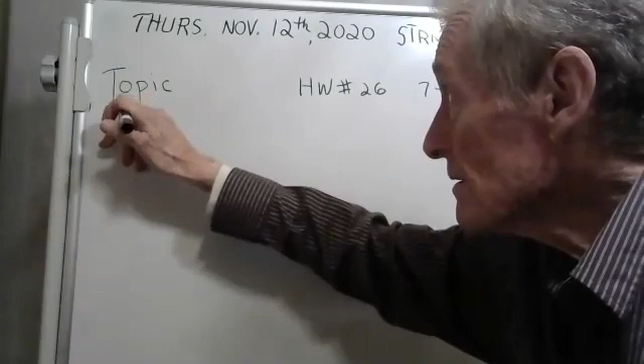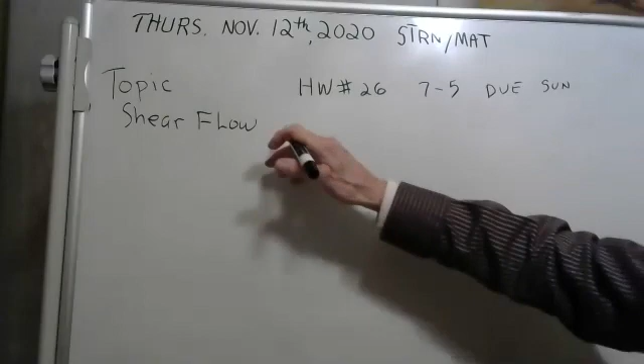No, I don't want to do your homework. Let me see what would be good to give you guys. Where is this stuff about shear flow? I think it's chapter 7. Let me snoop around here. Yeah, there it is. Shear flow. It's on page 386. Yeah, I want to talk about that. But let's see what would be a good problem to give you. Yeah, there's one there. That would be good.

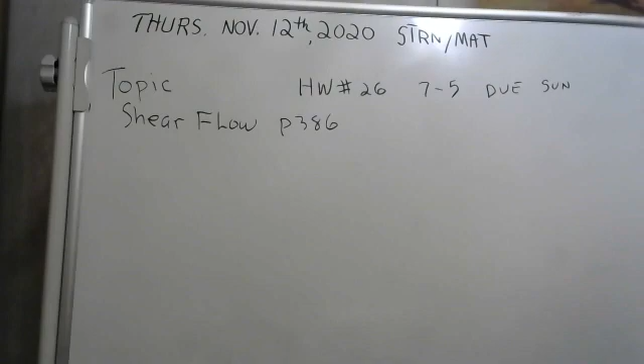All right. But before we launch into the exciting world of shear flow, do you have any questions for me?

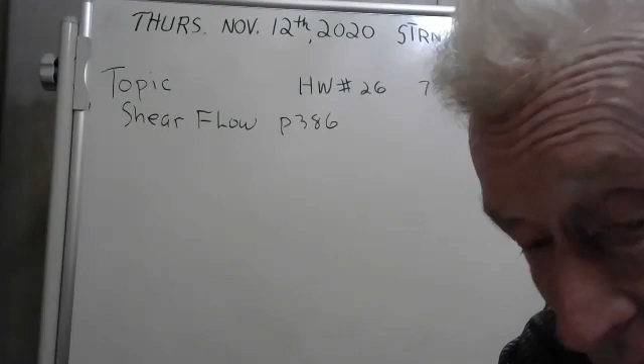Well, I wonder if I'm even connected. Let me go ahead, somebody. Hello, say hello. Hello. Yeah, hello. Yeah, we're connected.

Yeah, we're doing okay. Well, let's see if I can explain this shear flow stuff, and then we'll work a problem. Does that sound good? You're supposed to say, oh, yes, it does, Mr. Griffin. Okay, well, that sounds good. Yeah, it sounds good.

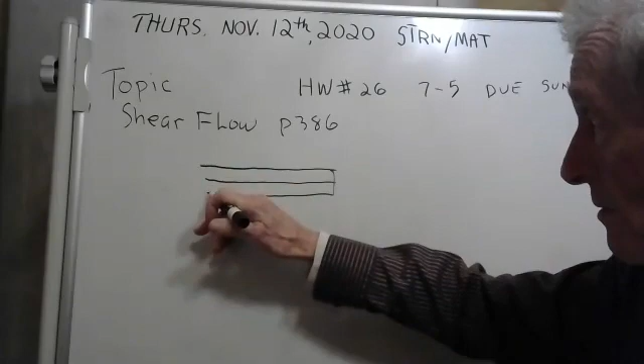All right. I've told you guys that if you have, they're talking about built-up members, and sometimes they'll put layers of maybe 2x6s together, and they can glue them even. You can glue a whole bunch of, well, maybe 4x6s, and you can make a beam out of that. See, if you glue them. But there's a weakness there where they're glued and they can slide if there's enough bending stress.

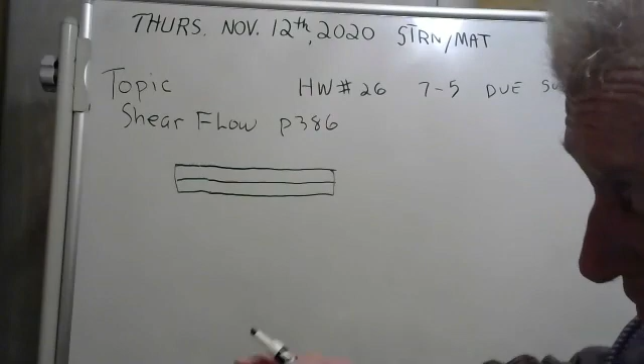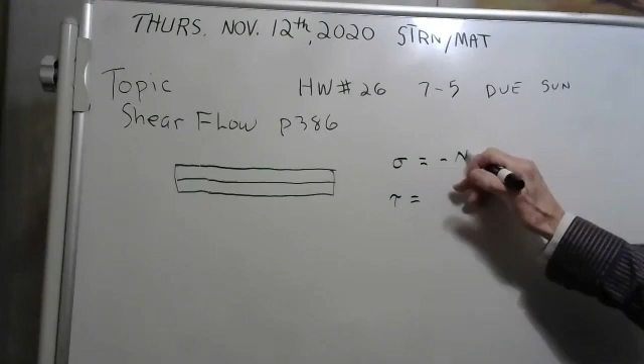You guys know that when you bend something, it creates not only normal stress but shear stress. See, the normal stress is given by this equation, and the shear stress - these are caused by bending. And see, if you bend this thing, usually the beams that we're talking about,

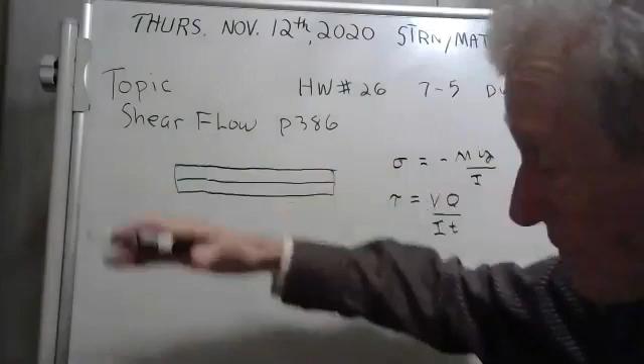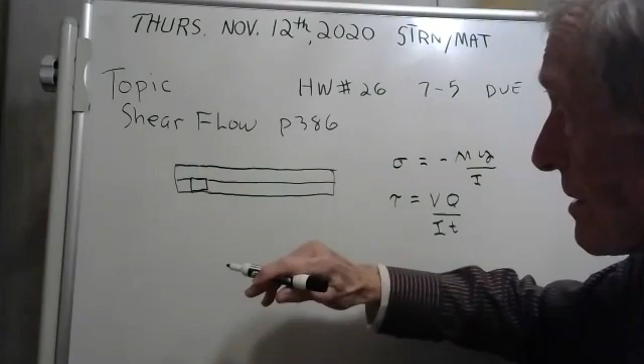they kind of sag in the middle. So there's a force from this top, whatever it is, of 2x6, on the bottom 2x6. There's a shear force going to the left. Here, I'll just draw us a little piece of that. Here we go. There's a shear force going to the left on that.

And that shear force comes from the top piece. That makes sense, because the top piece wants to slide if this thing is being bent. And that shear,

they have a thing called shear flow, and what it is, here, let me write that for you. They use a symbol W for it - no, they use a symbol Q for it. It's called shear flow. And what it is, the shear force divided by the length. See, there'll be a force on that.

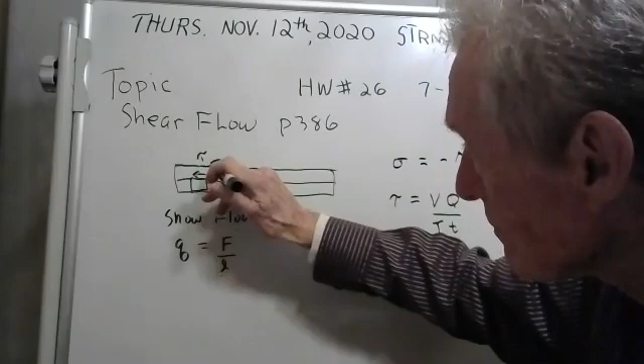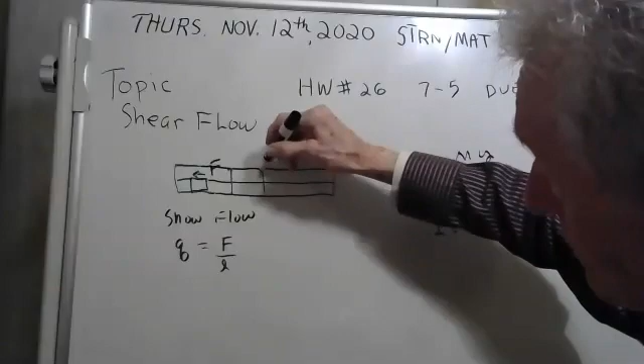There'll be a force on that bottom board going to the left, and the length is whatever length you want to talk about. Usually they'll nail it. Maybe they'll put some nails in here. See, every so often they'll put some nails in there, and the length is the distance between the nails.

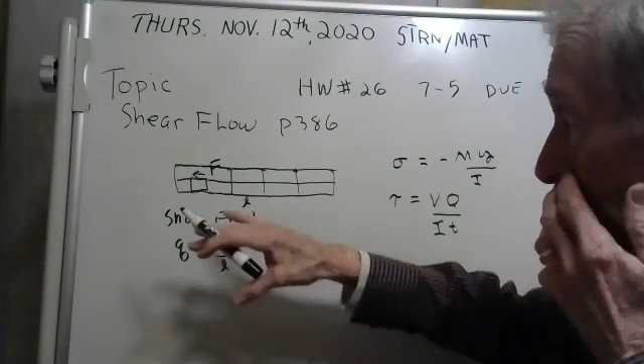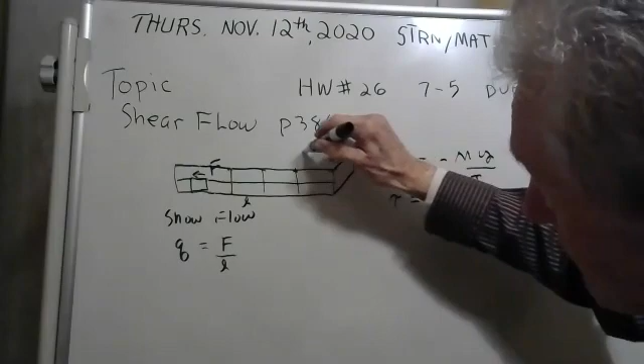The shear flow, this is the symbol for it, it's Q, and it's equal to that force. It's like a shear force, only your shear force on your beam is a force going down like that.

But see, if you looked at a little element inside the beam, a little stress element, you've got shear stress doing this. See, if you got shear going down on a left, on this face here, if that's going down, you've got to have something going up. Sum of the forces have to be equal, and that would cause rotation. So you have to have shear stress going this way here on your little element. I don't know if that made a lick of sense, but

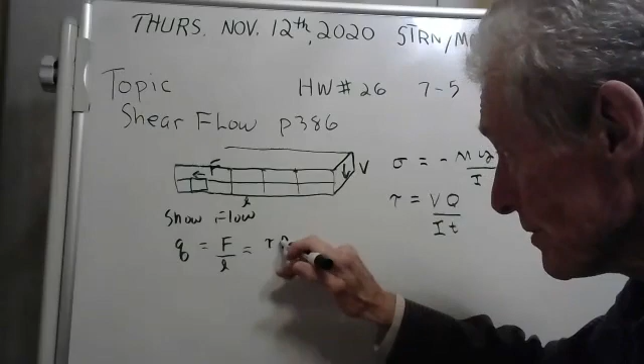let's continue this equation here. Now that force is equal to your shear stress times your area. You guys all know that. Stress is equal to force divided by area. So force is equal to stress times area.

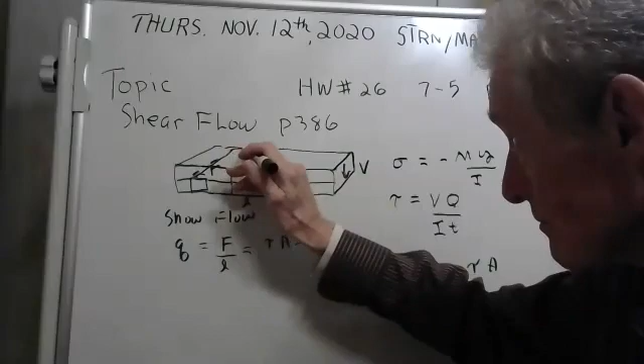Okay. And we've got a lovely equation for shear stress. It's right here in that area that we're talking about. I'll try to draw it for you. It's kind of an area in here like this, where this is the thickness of your beam, and this is the area that we're talking about is this area here.

Why don't we just call that... what are we going to call that? Maybe X or L? Let's call it L, I guess. So what you have here is VQ over IT times TL, right?

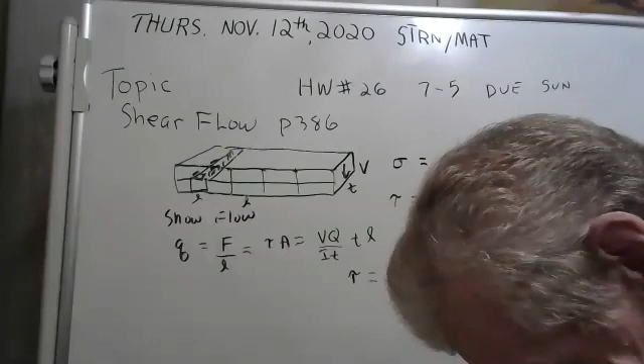Just a minute, I just about got this figured out. VQ over IT. Guys, I'm having a little trouble here, just a minute. Having a teeny tiny bit of trouble here to show you where this equation comes from.

That is shear flow, it's the force per length. And that is the length. I forgot my length - there's my problem right there.

Okay, so there, I've got the area, which is TL. I've got an L down here. There we go, okay, so when you do that - by Jove, couldn't figure out what I was doing wrong there. I forgot to divide by my length.

Because see, shear flow is force per length. Look here - the T's cancel, the L's cancel, and you get VQ over I, make some room here. VQ over I. By Jove, we're done. Now look at that equation on page 386.

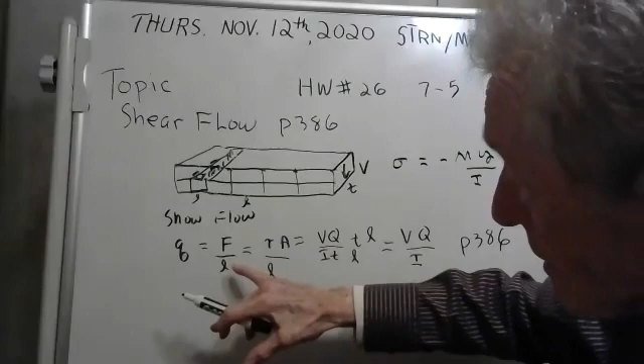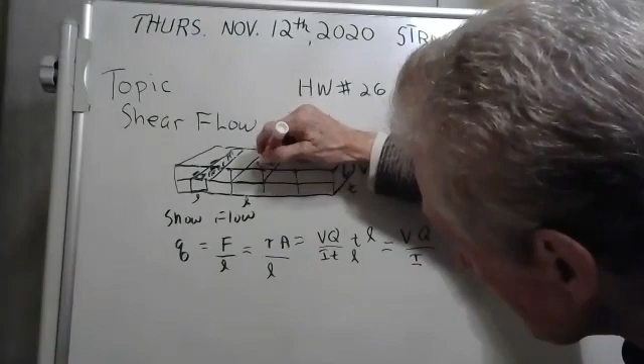That's where it comes from. I didn't explain that very good, but see, there's a force on that bottom board that you're trying to fasten to the top board. It's going to the left, and shear flow is that force. Maybe I could draw it better like this. Here we go, let me get some red here. There's a force on that bottom board going to the left.

If this thing is being under a bending load, that force is equal to the shear stress times the area. Well, the area of that is equal to the thickness of your board times whatever length it is. Okay.

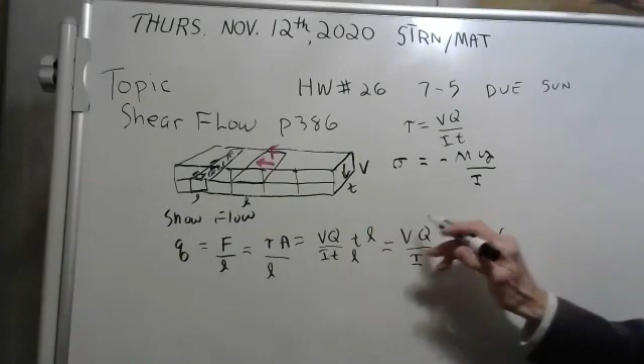So we got tau A over L, but tau is VQ over IT, the shear formula that we developed in learning how to use. And so you take the area, which is TL, and divide by L, and by Jove, you get that. That's it, guys - we just came up with a formula for shear flow. All right, let's see if we can use it here.

I thought we could go through one of these problems. Now, this problem is going to take a while. But before I do, are there any questions or comments?

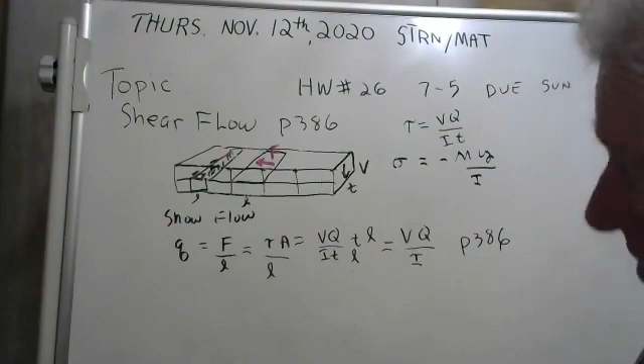Well, go ahead - after you do that problem, whatever problem we're gonna do, I just want you to go over 7-5 a little bit. Let me find 7-5. Just a minute, you know what page it's on? Yeah, it's on page 382, thank you so much.

I'm just having trouble with the moment of inertia with that... oh, okay, wide flange beam. Yeah. Well, here, I'll write it out for you, Mohammed. I just need some room to do that with.

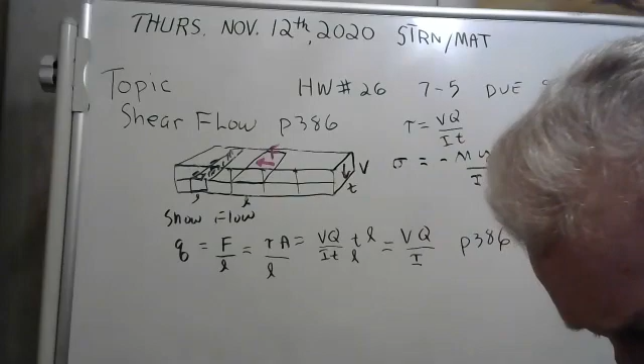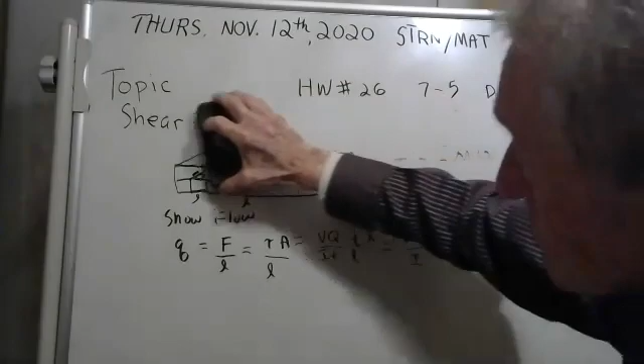Now that's part of your homework there, Mohammed, that you know that. And yes, he's having a little trouble getting the moment of inertia. And if I show you how to get the moment of inertia, I bet you can finish the problem, can't you? Yes. I bet you can. Well,

Now you're really lucky here, Mohammed, because it's symmetrical. It's symmetrical. And you can use that shortcut method that I taught you guys. I don't know if I have this to scale very good. Not too bad.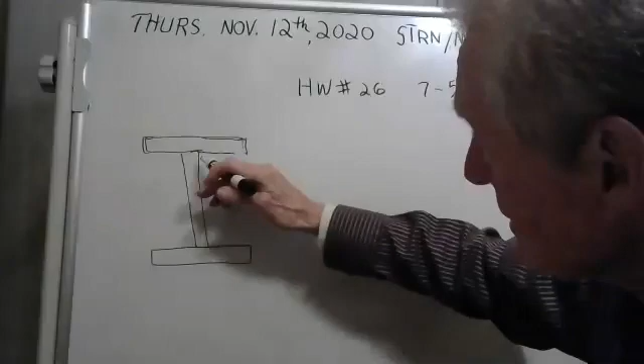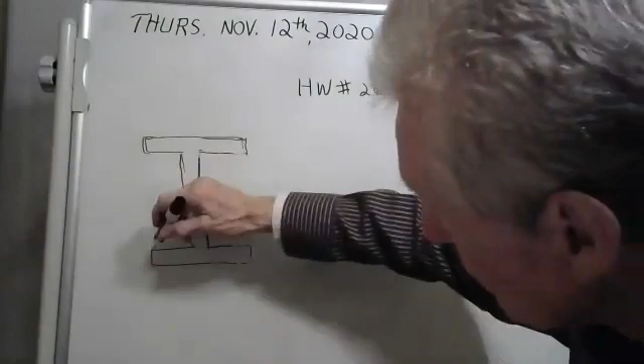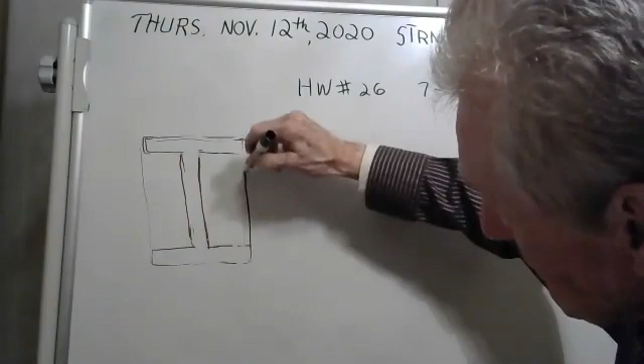The easy way to get this one is to take this whole thing, which is pretty easy to do. If you take the moment of inertia of that whole thing, it's 1/12 the base, and they said the base is 0.3, times the height - now the height is going to be 0.44.

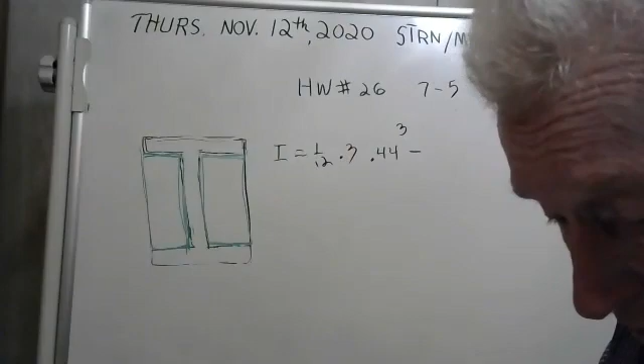Are you with me so far? Yes, sir. Was that a yes? Yes. Yeah, okay. But see, then you have to subtract these green areas. I don't know if green shows up on your computer there. But see, what we're going to do is we're going to subtract these green areas because they're not there. We're going to subtract them. All right, here goes - minus,

Well, you could just consider this something that has a width of - well, it'd be 0.3 minus 0.02, so that'd be 0.28, times the height of that, which is 0.4 cubed. Now that's doing it the easy way. Let's go ahead and do that. I'm plugging that in now, Mohammed.

I'm getting 6.36 times 10 to the minus fourth meters to the fourth.

Did you get that? Yes, sir. How did you get that 0.28? Can you show me? The minus 1/12 and 0.28, how do I get the 28?

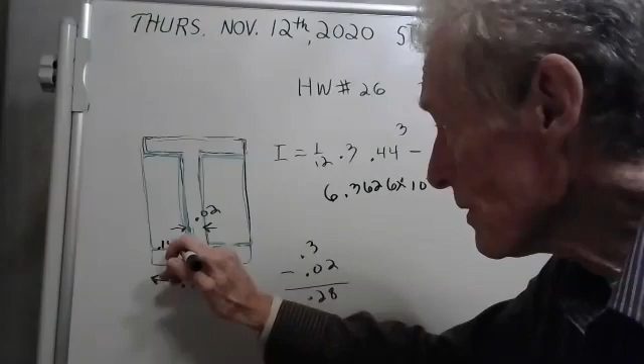Or you could do it this way. This is 0.14 and this is 0.14, they add up to 0.28. You could break this into two pieces. Instead of writing it like this, you could go 0.14.

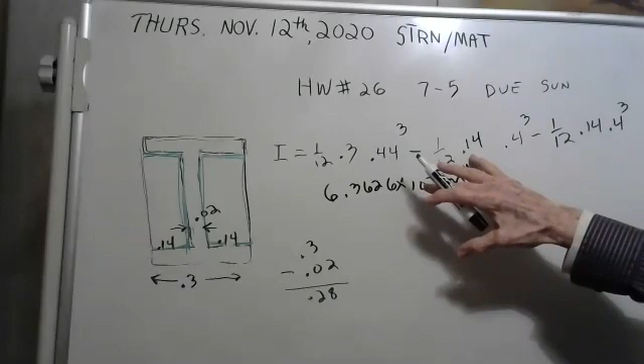Here, we'll do it that way. Minus 1/12, 0.14, 0.4 cubed. I was just too lazy to write that out, so I wrote it as 0.28. Does that make sense? Yes, it does.

And so you're okay now? Yes, sir, I'm okay, thank you so much. Okay, all right, well I want to do another problem that's going to be a little harder than that.

And that's problem 735. Yeah, here it is. Now to do this properly, you really need an accurate diagram, so I'm going to attempt to do that. Now this one has 12 inches - I think I'm going to use 12 centimeters.

And I'm doing 735, trying to draw it to scale. I really would like to have it bigger than that. I think I'm going to use inches instead, but I'll use a scale - instead of 12 inches, I'll use 6 inches.

There we go, that's 6 inches. And the width there is 1 inch, so that'd be a half inch, wouldn't it? Yeah, that'd be a half inch. So let me draw that.

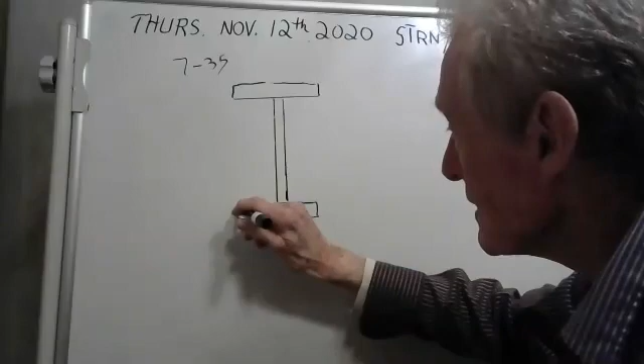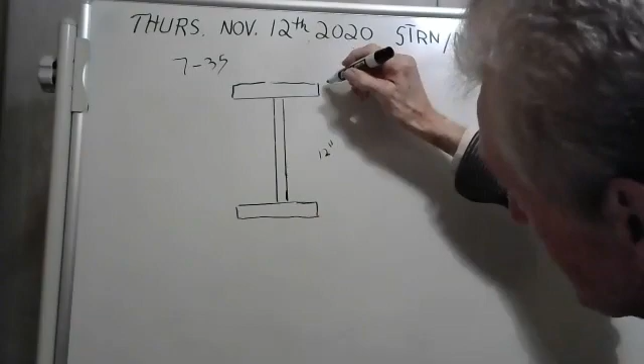Now we can label all that stuff. This is 12 inches. Come on now, that one's 12 inches. These are 1.5 inches. These are 5 inches.

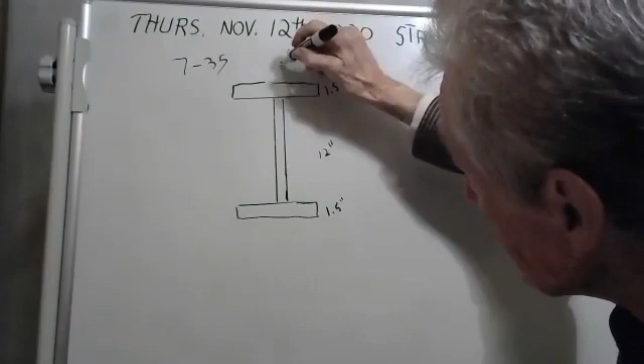No, they're 10 inches - they're 5 inches on my scale. See, I just divided everything in half, but we're putting the correct amounts in there. And then, now here's where I goofed up.

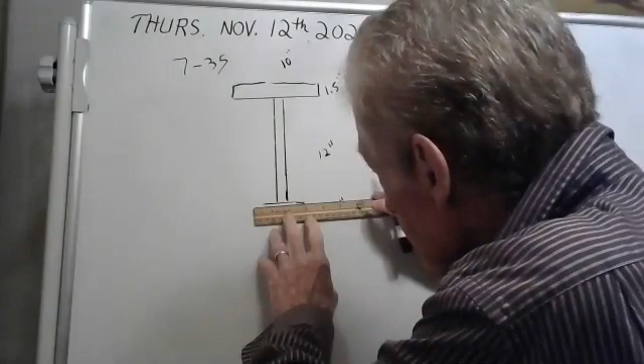This is where I goofed up. This is only 3 inches. Put you right here. There we go.

Yeah, there we go. These are 3 inches, 1.5 inches. The 12 inches here, 1.5 inches, 10 inches. I think I got it pretty good.

Okay, now our first task is to get the moment of inertia. Well, you know that method we just used on Mohammed's problem, where we had some stuff and we subtracted some stuff? You can't do that on this.

Only if it's symmetrical about the X and Y axis can you do that. Here we've got to do this one the old-fashioned way. So here we go.

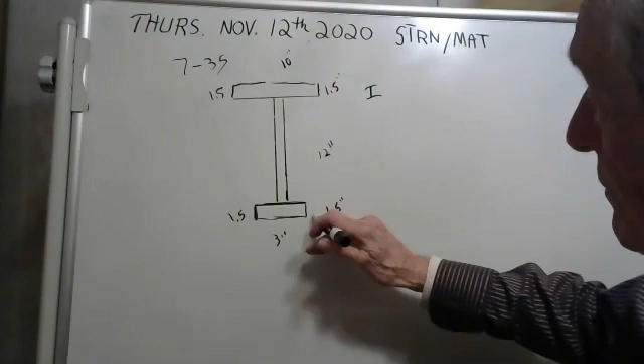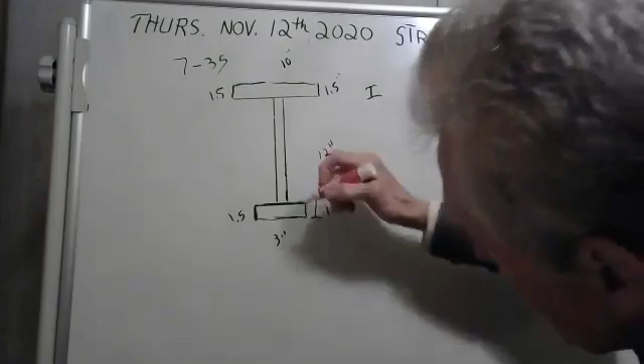Now to do that, first we got to find the centroid. Well, let's measure everything from here. We'll measure our distances down here from the bottom. And to do that, you need to get your red pencil and put a red dot right here,

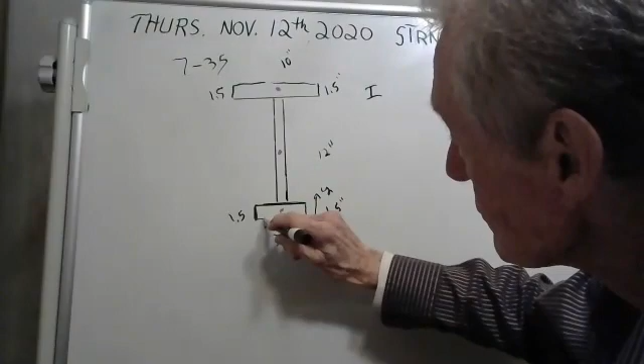here, and here. And we need those distances. Well, this distance here, you know what that is? That's 0.75 inches.

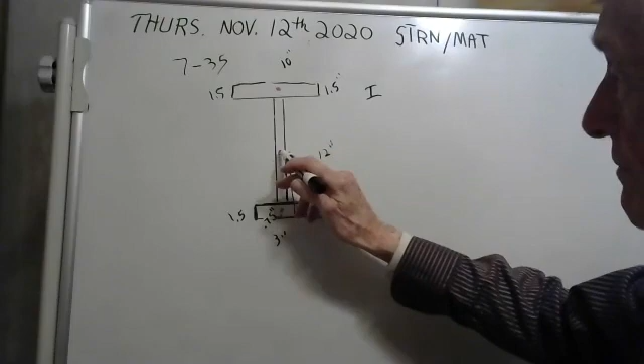It's half of 1.5 inches. And you see this distance here? That would be 7.5 inches. Do I need to explain why it's 7.5 inches from the bottom to that red dot? You okay with it?

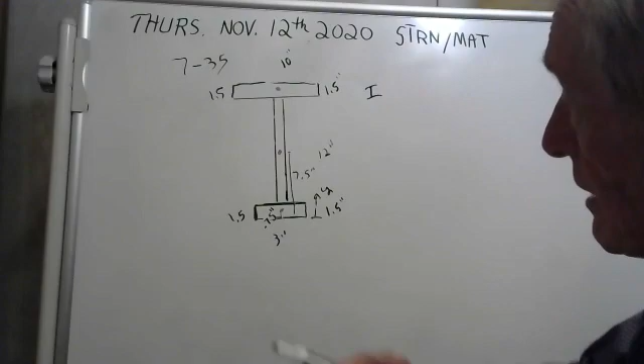And finally, I need this red dot here. See, this is 7.5 inches. But if you want to go to this red dot up here, that's going to be 12 inches plus 1.5. What does that make? 13.5 plus 3/4. 14.25. I wonder if I did that right.

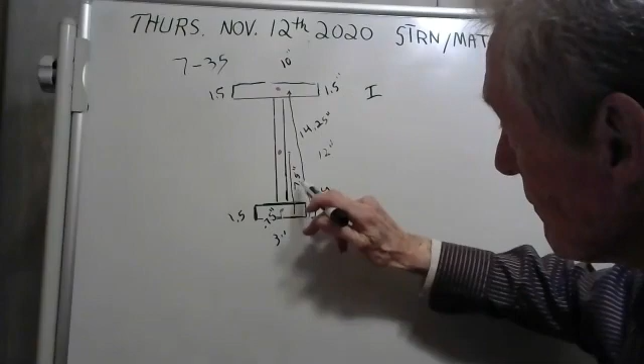Let me do that on my calculator. From the bottom, I'm trying to go from the bottom here. All the way from the bottom up to that red dot is the 1.5 plus the 12 plus the 3/4. Yeah, 14.25. Did that right.

We have to find all those in order to find the centroid. Mr. Griffin? Yes, I'm listening. I think at the bottom of the beam, did you write 3 at the bottom of the beam? The 3-inch? It's wrong, it's 6 inches. Yeah, it's 6-inch. Mohammed had just gotten the first thank-you point of the day, and I appreciate it very much.

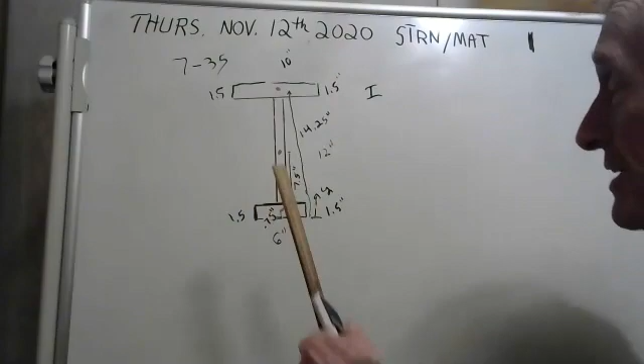It's actually 3 inches on my ruler, on my scale that I used, guys. But I divided the 12 inches by 6 inches. You understand? And then the 10 inches, I made 5 inches. But Mohammed was absolutely right, and I appreciate it.

Okay, and I think we did all that, and now we're going to write the centroid. Before we can find the moment of inertia, we've got to get this centroid. And I tell you what it's going to be - there's a formula, they all look the same, they go like this.

All these centroidal formulas look the same. So I'm just going to do it. Here goes. It's going to be 0.75 times this area.

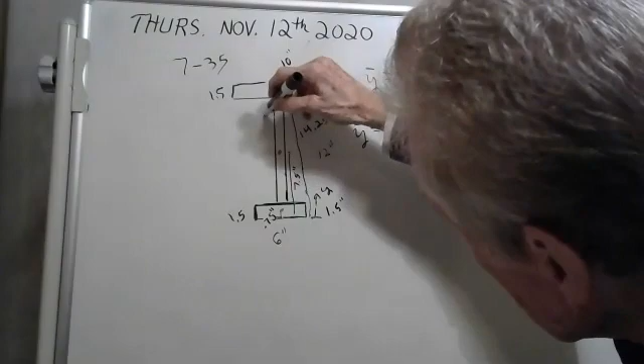What that is, 6 times 1.5, plus 7.5 times this area. Now they said the thickness of this one is just 1 inch. Remember, I used 1/2 inch, I think, on my, yeah, see, I used 1/2 inch. But that's just 1 inch wide there. So you go 7.5 times 1 inch times 12 inches.

Plus 14.25 times 1.5 times 10 inches. Then you have to divide by the total area, which is 6 times 1.5, plus 1 times 12, plus 1.5 times 10. And we'll have our centroid. Now go ahead and do that. You do it, and I'm going to do it, and we're going to get our centroid.

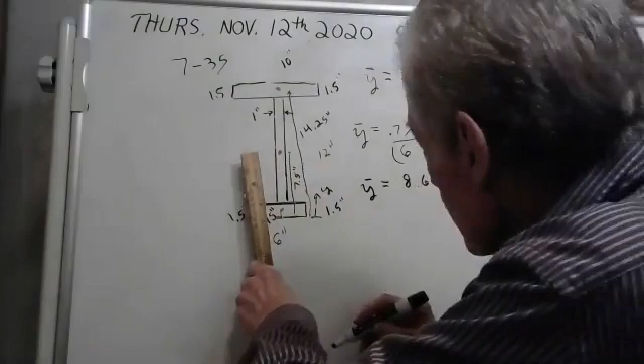Now let me draw that. 8.625. Well, on my scale that would be 4.3125, right? Yeah, it puts you right about right in here.

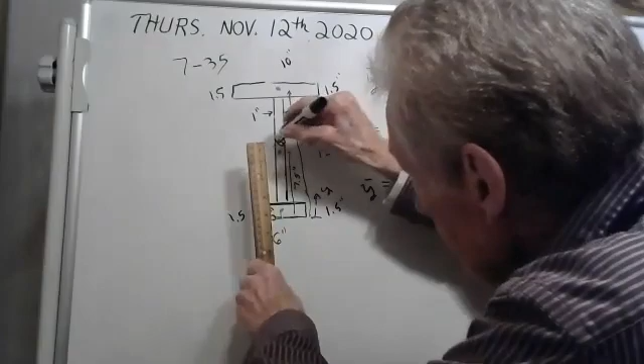That's where the centroid is. Here, I'll draw up here. I'll go up here. What's that, 14.25? I got lost. Oh, that's that distance all the way up to the top. But the centroid is 8.625.

It kind of makes sense that it's not going to be where that red dot is, because this flange is bigger than that flange, and so the centroid kind of moved up a tad. Kind of makes sense. Now, to find the moment of inertia, we're going to need these distances here.

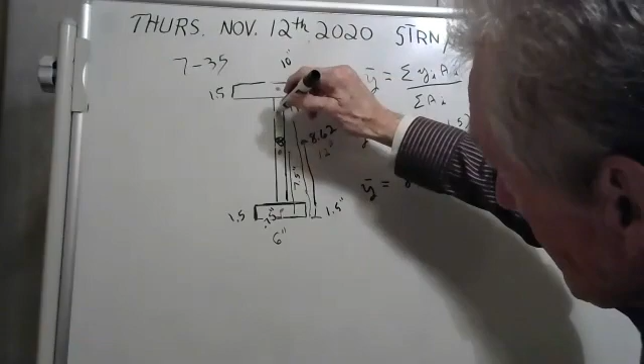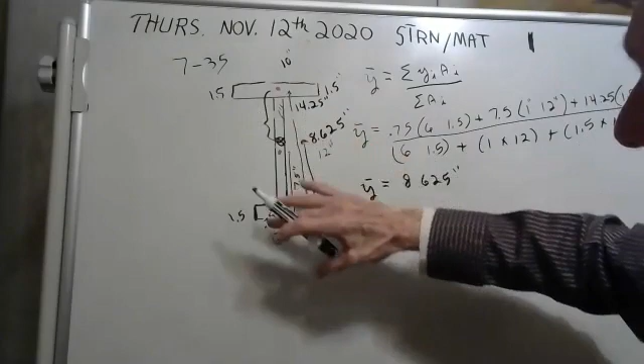You see this distance? That's 1 inch, we already know that. I'll put 1 inch right there. There we go. You see this distance here? I need that distance. I'll tell you what it is. It's 14.25 minus 8.625. Here, I'll write it for you.

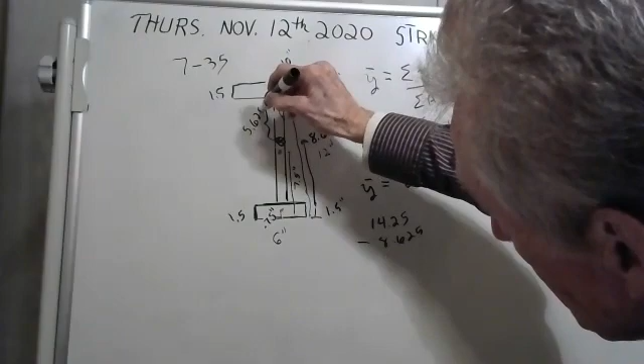I need that distance in order to find the centroid. Okay, well let me do that. Let's see, I need to subtract. I need to add 14.25. This distance right here is 5.625 inches.

I need this little bitty distance right here. See it? See that little teeny tiny distance? I'll tell you what that is. That's 8.625 minus 7.5. Let me see what that is. I'm getting 1.125. That little itty bitty distance is 1.125.

And finally, I need this distance here. Now, wait a minute, I'm getting mixed up. I don't want that distance. No, no, no, no. I want the distance from this centroid to there, that's what I want. Now I'll tell you what that is. That's 8.625 minus 0.75. Let me see what that is. 8.625 minus 0.75, I'm getting 7.875. The distance from this centroid of the whole piece to the centroid of this bottom flange is 7.875 inches.

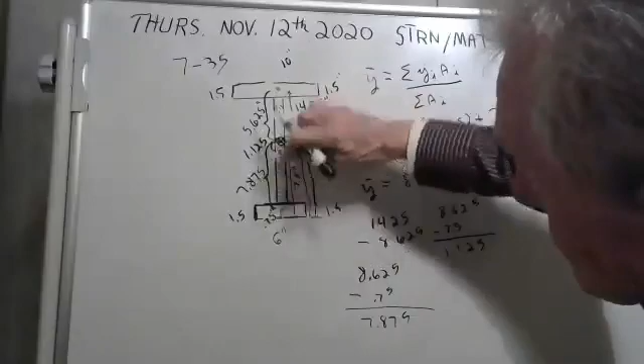But it's important, we've got to get this moment of inertia for several reasons. The shear flow depends on it. See, this is a built-up thing. They've taken this flange and attached it to this web, probably with nails or glue or bolts or something. Looks to me like they've used some kind of dowels there. Maybe they've drilled holes and put dowels in. By the way, if you wondered what we're doing, we're doing problem 735.

And now we're going to find the moment of inertia. I just need a little room here. I don't need any of this stuff because we figured it all out.

One of the things they're asking in this problem is what the maximum shear is. We'll find out, we've got an equation for it. No, they're giving us the maximum shear that can be allowed for this material. They want this, and we're going to get all of these things. They want us to find the maximum shear.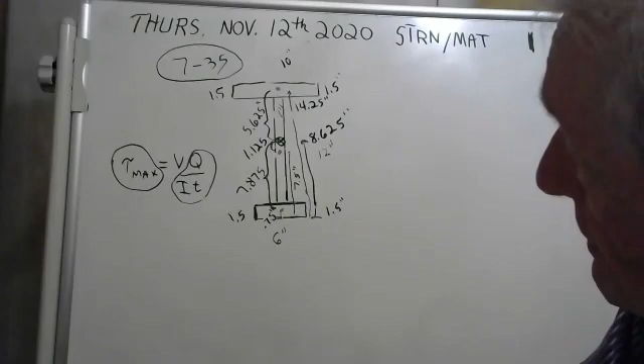But in order to find this unknown, we're going to get all these. To find the maximum shear allowed in this particular beam cross-section, we must get the moment of inertia. Okay, well, here goes. Now you've got to do this the old-fashioned way. Remember that method I used on Mohammed's problem where we subtracted some stuff? You can't use that — it won't work unless you have a very symmetrical beam cross-section.

So here's what we're going to do, one piece at a time. We'll take this bottom piece: that'll be 1/12 times 6 times 1.5 cubed. But that would be the moment of inertia of this bottom flange if figured about its own centroid. Well, it's not — we've got to add the parallel axis theorem.

We'll take this area, which is 1.5 times 6, times 7.875 squared. That's the parallel axis theorem. This is the moment of inertia about the centroid of that bottom flange, but we're trying to find the moment of inertia about the centroid of the whole piece. You have to take that area times the distance from the centroid of the whole piece to the centroid of the bottom flange. There it is.

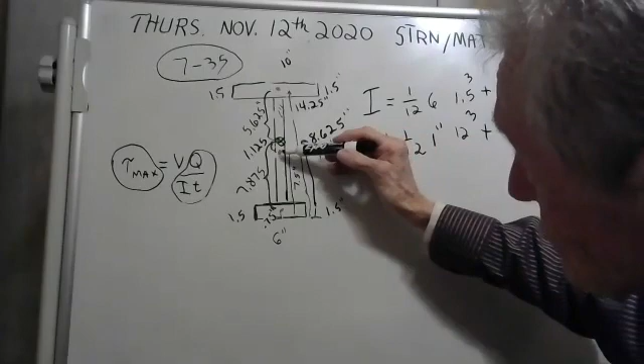Okay, we're not done yet, we have to do the web now. The web's going to be 1/12, 1 inch times 12 inches cubed — didn't they say it's 12 inches? Yeah, that's right. But that would be the moment of inertia of the web about its own center. We're trying to find the moment of inertia about the centroid of the whole piece, so you have to add 1 inch times 12 inches times 1.125 squared.

And finally we've got to do this top flange. That's going to be 1/12 times 10 inches, 1.5 cubed, plus the area of it, which is 10 times 1.5, times that distance — the distance from the centroid of the whole cross section to the centroid of the top flange. It's 5.625 squared. All right, I want you to add all those up and tell me what you get.

I'm going to do it — you do it and tell me what you get. It's tedious, a little bit boring, but it's not that bad. Try filling out an income tax sometime if you want to try something tedious and boring.

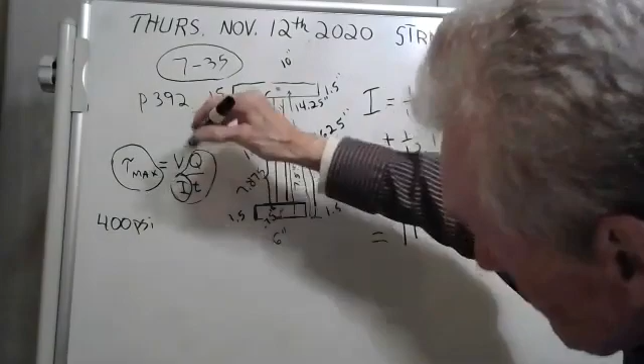And hey, look at here, we just got this — we're making progress, we got 2 out of these things. Now the thickness — they're talking about the thickness of this web where we're trying to figure where the maximum shear stress is. Well, it's 1 inch. I know what that is here, I'll write it down for you: T is equal to 1 inch. That's how thick that web is, they said it's 1 inch. So look, we got that.

You know what? We got that, and that. If we could only figure out this Q thing here, we could figure out what they want, the maximum shear that this beam is allowed to have.

Okay. Well, let's figure that out. They have a name for that. They call it the first moment of area.

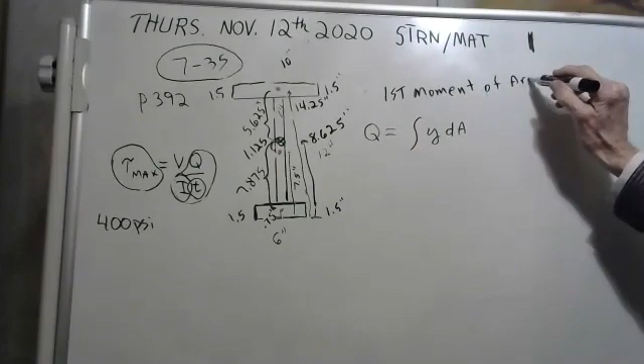We're going to try to find this Q thing. Now, by definition, that's what it is. It's the first moment of area, that's the name of it.

I told you about it last time. You've seen it before in some formula. I know you've seen the second moment of area, it goes like this. That's called the second moment of area, and that happens to equal the moment of inertia, that's the definition. Well, this is the definition of the first moment of area.

But here's how you do it. There's a step-by-step process. Step number 1, step number 2, I don't know, maybe step number 3.

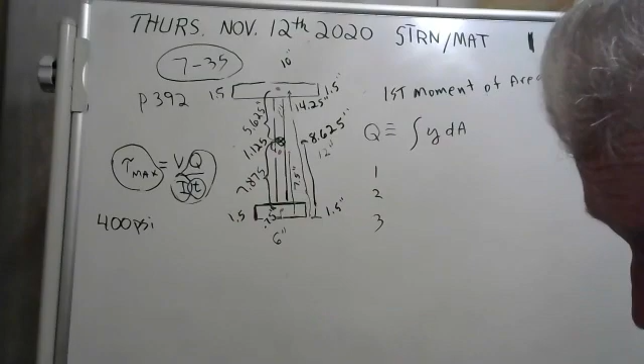The first step is you draw a line through. Let me make a green line, that'd be good, I'll get some green color here. You just draw a line through, there's my green line.

You draw a line through whatever place that it is that you want to find the shear stress. You're trying to find the shear stress. We know it's maximum there at the centroid. And to find this first moment of area, you draw a line through that place, the centroid, where we're trying to find the maximum shear stress.

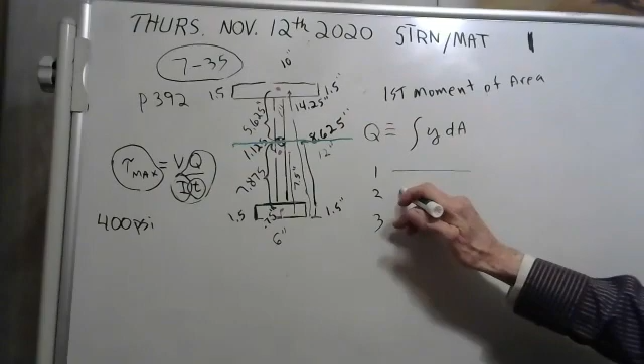Step number 1, you draw a line, da-da-da-da, we did that. Step number 2, you color everything above the line. Okay, well, let me do that. I'm going to color that above the line. You know what, this is above the line too, isn't it? Color everything above the line.

And then step number 3, you just add them up. You add up all the YIs and AIs, because that's, we don't need to integrate anything. We just have rectangles, we don't need to integrate. We know how to find the area of a rectangle.

Okay, here goes, we're going to do it now. But to do it, we've got to find this distance here for that first area. Now that first area, I don't even know how long it is. I know it's 5.625 from here up to here, but you know what, that there is 3/4 of an inch shorter, isn't it? So let me write that down.

This is ugly, but we can do it. I think that green area right there is 5.625 minus 0.75. Here, I'll write it out for you: 5.625 minus 0.75 is 4.875. So the area is 4.875.

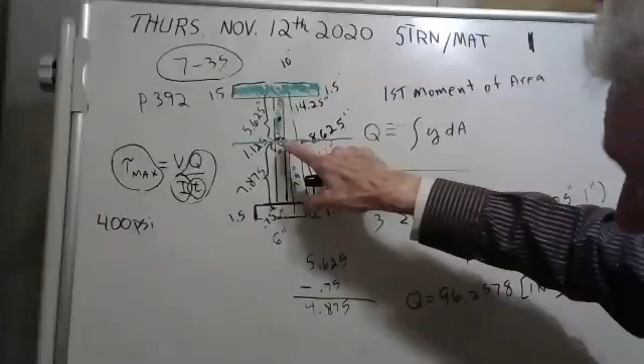Now this area here is 4.875 times 1 inch. And the distance from here to the middle of that area is 4.875 divided by 2. Now we're going to add this top flange. Now that area is 10 inches times 1.5 inches, that's the area. The distance from here up to that red dot is 5.625.

This is how you calculate this first moment of area. This is the definition, but we don't need to integrate, we're just going to add up those 2.

I don't know, Mohammed. Right, you think you're I'm just okay, confused. Yeah, I'm just confused how you get the 4.875. Oh, like okay. Here, let me show you where I got that from.

I know the distance from the bottom up to here, I never wrote it down. From the very bottom up to here, that distance is 13.5 inches, I believe. Because you got 1.5 inches, you got 12 inches. And then I'm going to subtract the 8.625, and that should give me this distance from here to here.

Let me see what you get. So 5, 7, that's where the 4.875 comes from. Do you see it? Okay, and half of that, well you divide by 2. 4.875 divided by 2, that'll give you this half distance, which you have to have in your equation here. Oh okay, now I got it.

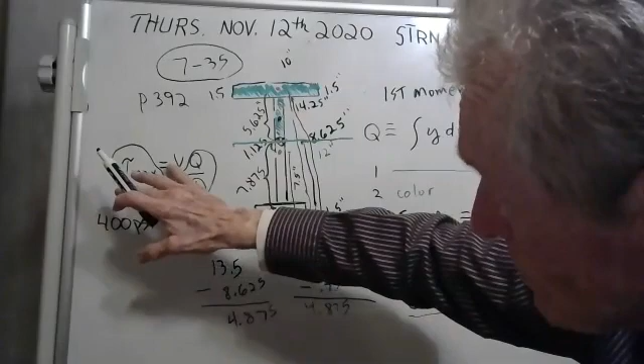Guys, here's an equation. We know everything except this unknown shear force. Solve it. I'm going to solve it and we'll see what we get. Go for it. Maybe I should write it out.

I did all that, and I got the shear. This is the maximum shear that you'd want, because with that shear, you'll get 400 PSI. And they said we don't want to exceed that. But I got a shear of 4971.8 pounds. Did anybody get a shear of 4971.8 pounds? Yep, yeah, there's two of us. There's four of us. Or three of us, I can't count that high.

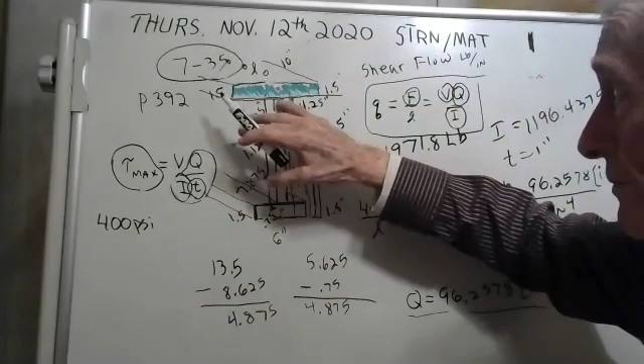And see, here's my problem. What we're figuring out, I made a mistake. What we're figuring out is if this thing was going to have sliding going on right there, but it's not. The sliding is right here. If there's any, this is where I needed to draw my line. Remember I gave you the little sermonette about putting a line through there and then coloring the stuff above the line. You don't color this. The stuff above, that's where that top piece is going to try to slide.

Because of the shear stress, my Q is wrong. We've got to find the Q if this is where we're trying to find where they're going to slide. Okay, well, this Q is wrong, so we're going to do the Q over again. This Q is wrong. Do you understand? These are three different boards.

And they're either going to glue them or nail them or somehow attach them. If it was metal, they could weld them. And see, the trouble might arise because of the shear stress. This top flange will want to shear on the web. And the Q - the little method I told you is fine.

You draw a line where you're interested in finding this Q, and then you take your distance, but the distance is from here to here. It's 5.625, and the area is 1.5 inches times 10 inches, and that's it. Well, let's do that. Here goes. 5.625 times 15. I'm getting

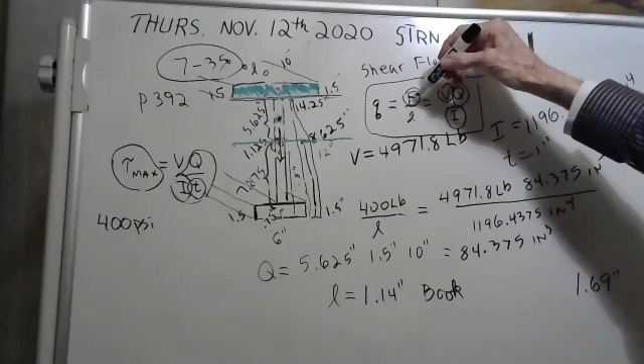Now, the force of each nail is still 400 pounds before it shears off, so that doesn't change. The shear on the whole cross-section doesn't change. The moment of inertia of the cross-section doesn't change. What's going to change here at the bottom is that Q. We're going to have a different first moment of area. Here's how you do it.

Here's the rule. See, this bottom flange is wanting to slide on the web, right? It's got bending stress on it, shear stress on it. And the shear will cause it to slide if you don't have it glued or nailed or whatever. Here's the rule: right here is where it's going to slide. So you draw a line through there.

And then to find the Q, the Q is going to equal the area of this—1.5 times 6, that's 9 square inches—times this distance here. You have to go always from the centroid of the whole piece down to here. We already have that distance: it's 7.875 inches. So now we're going to get the Q, the first moment of area of that bottom flange.

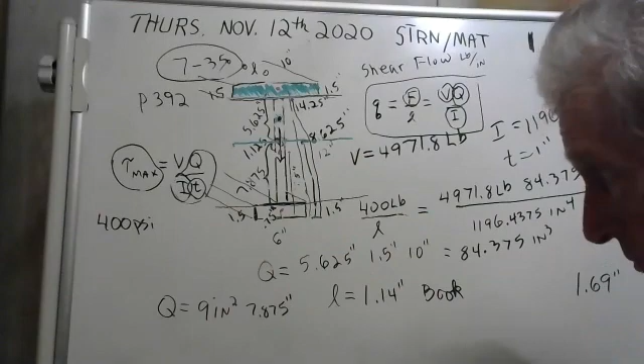Here goes, I'm going to do it. 7.875 times 9. I'm getting this Q—does this show up here? Yeah, barely. It's equal to 70.875 inches cubed. Here, let me write it all out for you.

We've got a different Q now, and the spacing will be different on the nails on the bottom flange. Do I have enough room here? Maybe. The shear is 4971.8. This new Q on the bottom flange is 70.875 inches cubed—we know it's inches cubed. The I is 1196.4375. And this F here is 400. So here's our new numbers.

We're going to solve for this—what they call L with a little b there, for at the bottom. See this equation here now? I want you to solve it. We know everything. That's an F, and it's 400 pounds. Solve for that distance between the nails on the bottom flange. I'm going to do it, and I want you to do it too. Here goes.

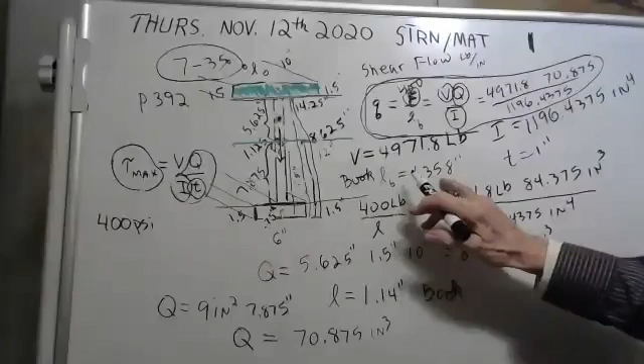That's what I got. Yay. Now we can look that up in the back, in the answer book, for problem 735, and it says at the bottom the spacing is 1.36. Well, that's the same thing we got. The book got 1.36 inches between nails—they just rounded off.

Any comments or questions on that? Well, okay, I got some homework for you. And we studied shear flow today.

What it's useful for is when they build these members up, when they maybe glue a bunch of boards together or nail them together. And see, there's a problem—they want to slide with one another. It's called shear flow. We have an equation for it. Any comments or questions?

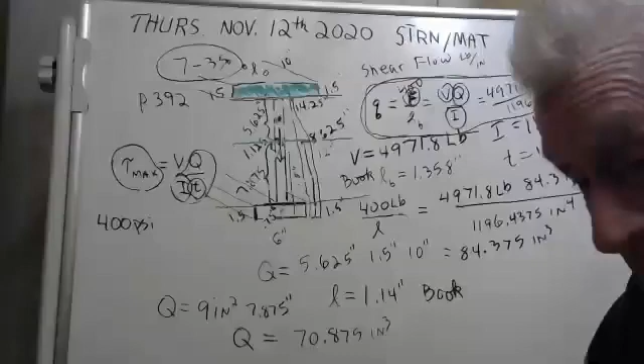Gosh, Brian, I don't know. Does anybody out there know what it is? I don't know what it is. Brian, erase it, I think maybe it was a mistake—remember, I did it wrong the first time. Thank you for asking, though, but I think we got it right. We got two different answers: 1.14 and 1.358, and those are correct. Thanks for asking, Brian. I honestly don't know what it was. Watch the YouTube video, Brian, it'll tell you. Anybody else?